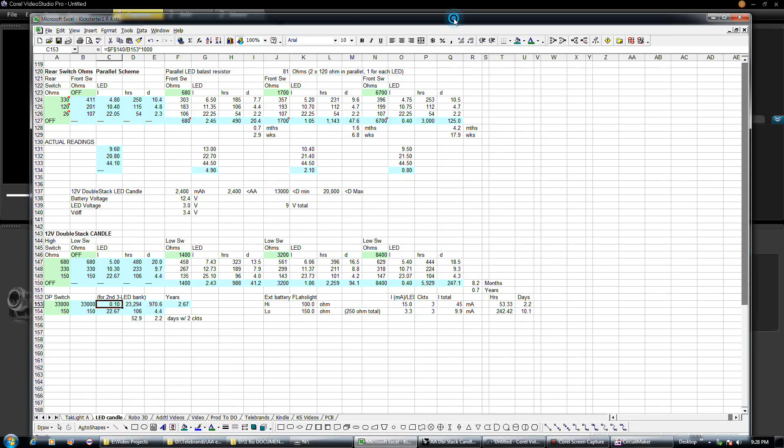Anyway, that's kind of what I'm doing with that, just to fill you in on the various settings on these switches.

Back to this, like I said, we got our relay kind of nestled up in there now, and go ahead and light back up the electronics layer 2. So that solves our crowding problem with this board here, by taking that relay out of the equation.

I'll call this relay. So we hide it if we need to. It's got those curves on it right now. I'm going to need to go ahead and move those to the LED board retainer layer, I think. Well, hold on. I guess I need a new layer.

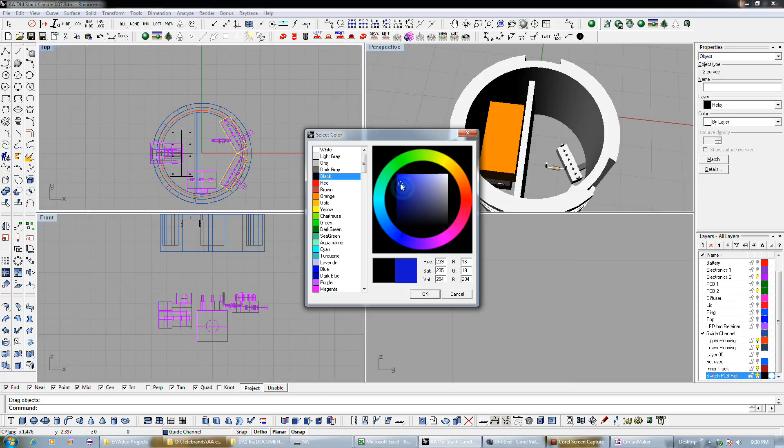Switchboard retainer, which is right below the guide channel. I'll move these lines to that layer.

So, anyway, with that I can hide her. What else disappeared? So, hide the relay there, and like I said, for this channel...

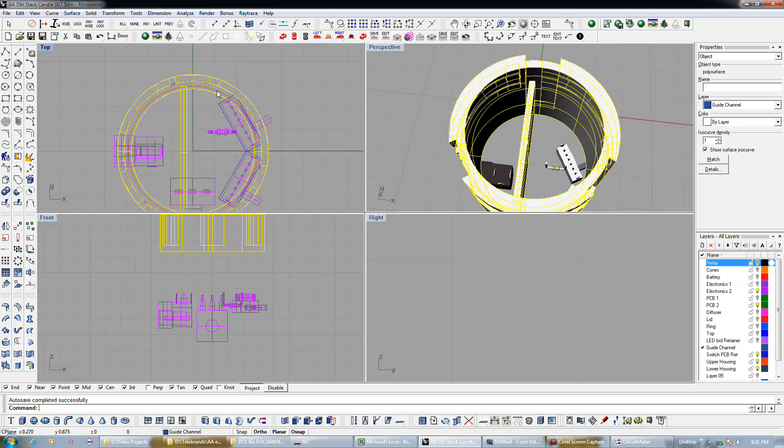Let me think about this a little bit. Because we're going to have this wall here. We know we're going to have this thick of a piece mating with this piece down here, whatever we're going to house the circuit board in. The circuit board is going to lay on top of whatever this is going to be.

And again, I was kind of playing with the idea that since this piece we're about to do is going to be printed from the bottom up as well, it could actually have a concentric ring in it, but that might be kind of hard to pull off given what we're doing here. So I'm still thinking about that.

Because our circuit board—we don't necessarily have to fully follow the wall thickness on this piece down below. However, if we're going to make a piece that concentrically joins on the inside of this, that could be tricky. And the other thing that's going to be tricky is the fact that I wanted a skirt to come down from this piece to join up here.

So I may actually have to, believe it or not, print an intermediate ring to actually adapt this piece to that piece. Could be a little screwy. If I did, I don't think that would work very well.

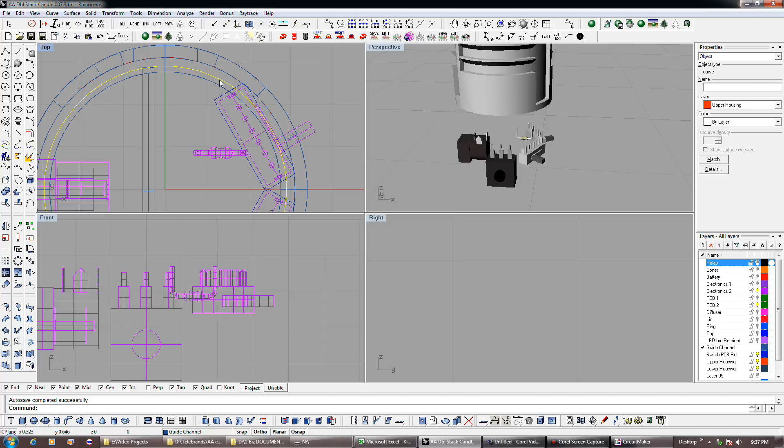See, our circuit board is probably going to have to follow kind of this line here. So I'll put that on PCB 2.

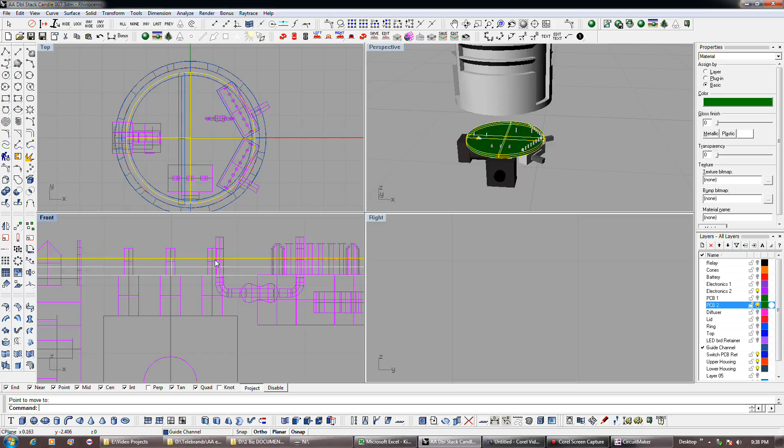Anyway, so that will probably be our basic circuit board layout there. And with this, we got plenty of room to position a few resistors and the like.

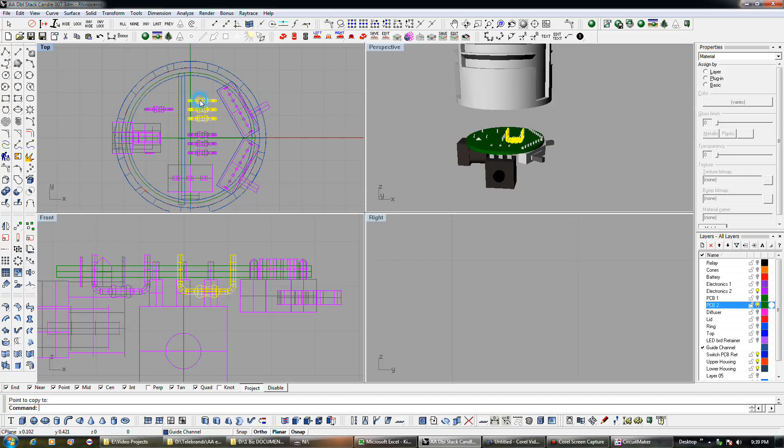Let's see. It's going to be tight. Something like that would be a layout, but...

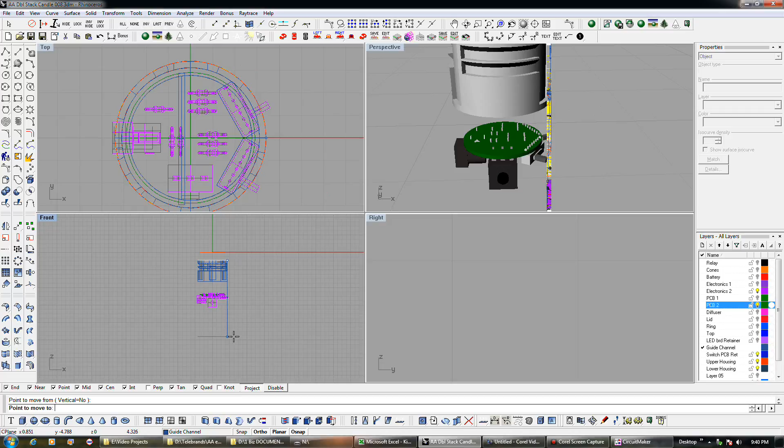So that's kind of what I'm going to focus on, I think, right now. Is getting this in basic position somewhere. I'll figure out where to put that exactly later.

That gets rid of that, but we know what our outer diameter is going to be. That's our circuit board, which has got enough real estate to accommodate all of our pins and everything, so it'll have to have a retainer.

Something like that in it, just to basically capture the circuit board. Then its walls will go from, will be these two. Its outer walls above the circuit board will come up like that, around it, and then mate to whatever we're going to do for a switch skirt. Whatever adapter we have to make, that channel guides to this part down here.

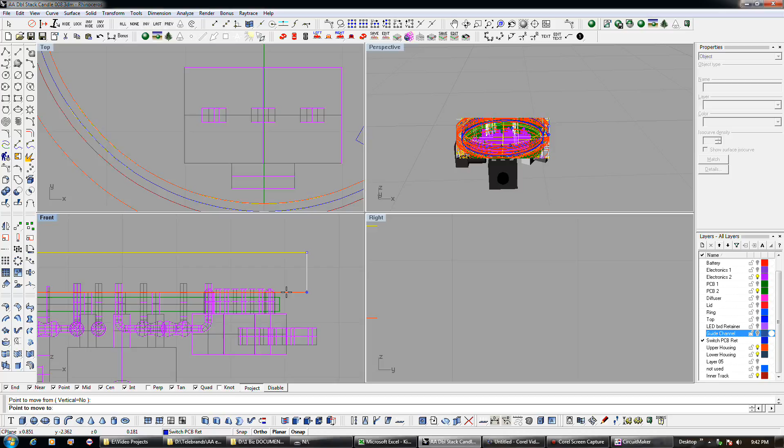So it's 204 mil. Bring it about here, because whatever adapter we're going to put will basically help allow for some room for the solder joints and all that.

But, like I said, before we do any of that, I've got to go in and provide some kind of a switch well here. It's starting to get annoying.

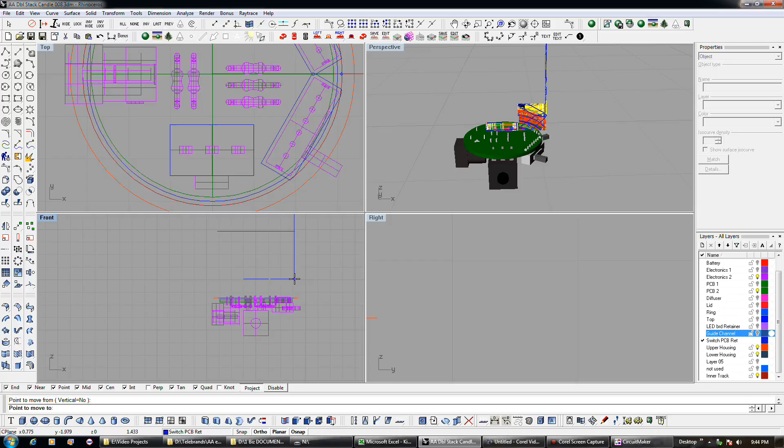Okay. Now this I'm going to put, I'm going to leave some pretty generous tolerance around it. This is fine. I drew this earlier and we imported it. That's from a previous switch well on a previous project, so I know it'll work.

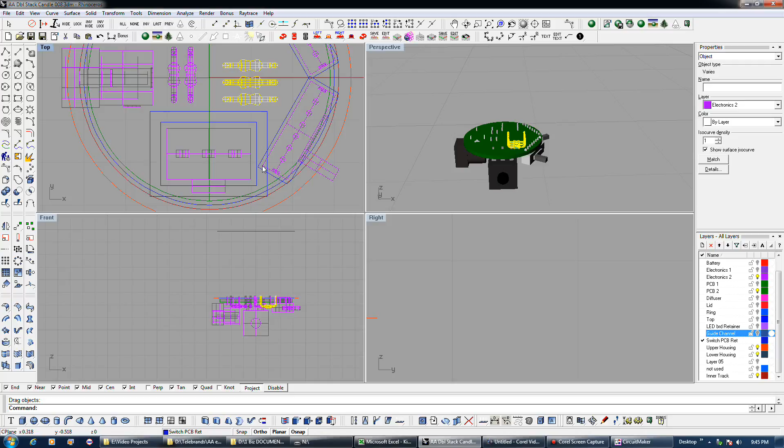Okay, this wall will be something like that, and again, this is below board, so these will run into it. So will these. I could go with less than a 1/16 of an inch, I suppose, but this is going to eat into it, so that's a little bit of a problem. Let me think.

Little closer tolerance here. Let's see what I can get away with. Still really nip into that.

I'll probably make this a solid piece with this. Yeah.

I got kind of a headache today. I probably shouldn't be doing this stuff.

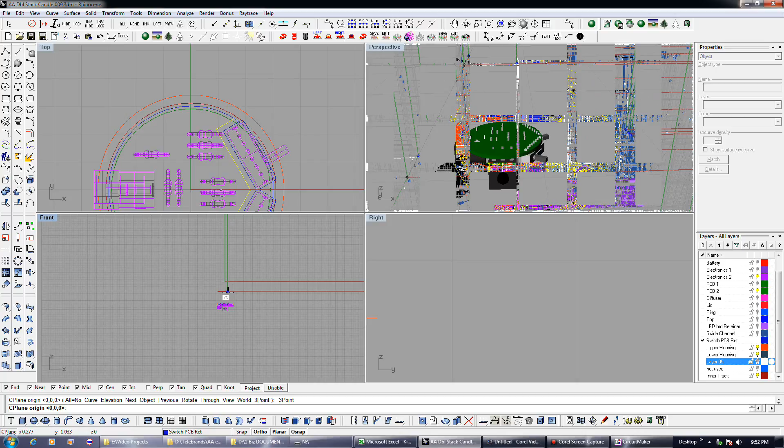Actually, I don't know why I did that.

Yeah, I don't know what the hell's going on. That's why I don't like messing with this, because like I said, these tools are kind of funky, and trying to move your C-plane, you know.

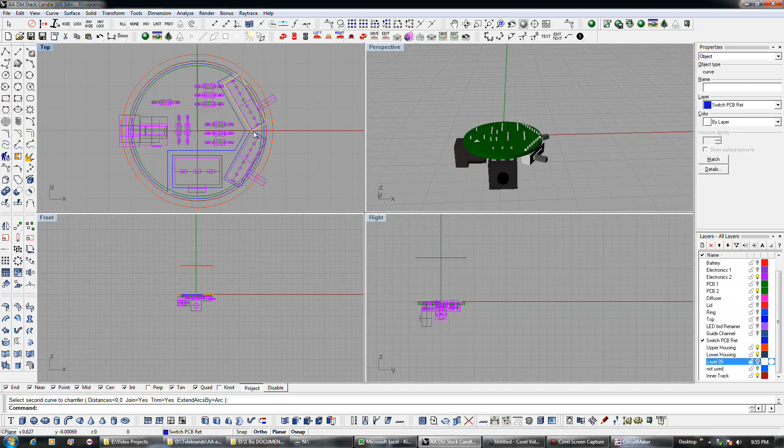Yeah, I probably will. First I'll save these just in case. Let's see.

Okay, so that's our switch wells, for both the switches. Now this, we got to do something a little different with, because this is the outer edge, and we're going to have a button that comes in here, but I can flatten that out, maybe.

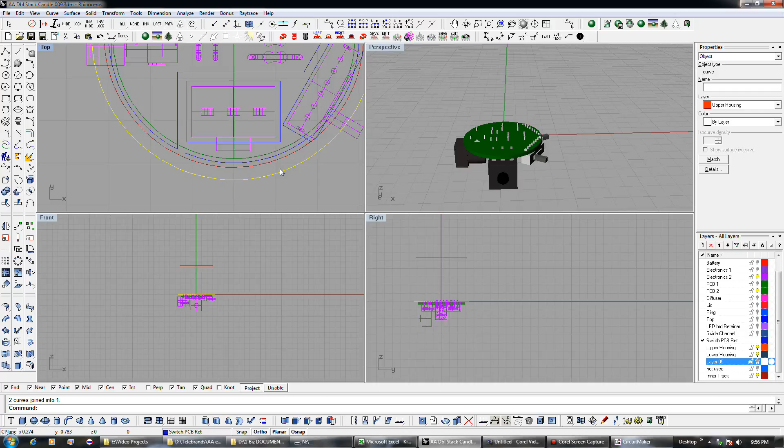So I might go ahead and just flatten it out and treat it, because I'm going to have to print my own button, because the switch is just not long enough to stick out through the side of the housing, so I've got to print my own plastic button. I'll probably make it circular,

Which we should be able to get away with, so I probably don't need this piece. I'll just save it for later. But I'll go ahead and just keep everything flat. That'll keep things nice and simple.

So that'll be our cutout, and here we'll have a button. It's got to be within this limit.

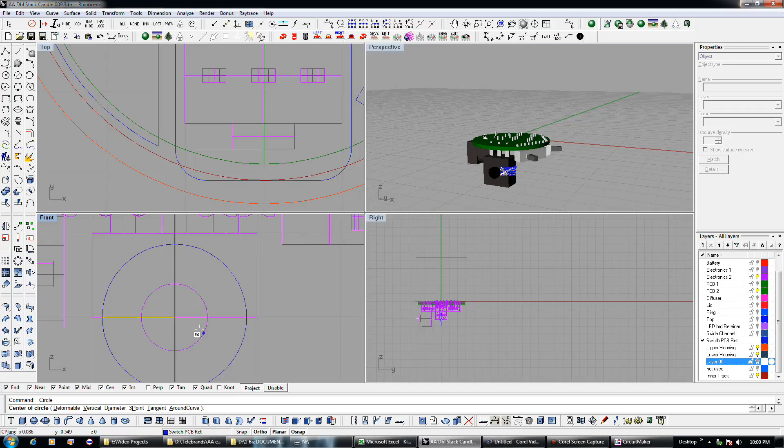Okay, so this is, well, okay, 437 mil diameter. So I'll take it about, yeah, so it's 437, 387.

Okay, so that'll be the hole for it. Okay, so this is 387.

Let me give this tolerance like that. So that'll be our button diameter right there, about 337 mil, so it's certainly well over a quarter of an inch, almost 3/8.

That's a pretty good size for an actual physical push button. That'll be the hole for the push button that we're going to drill on the side of the part we're about to create. And that'll be the inner layer of the push button itself. So, let's move these curves up here.

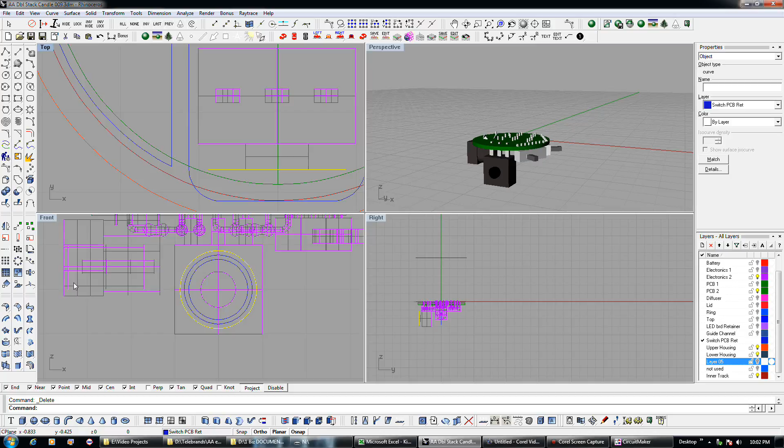Now this button right here, again, I'm not going to really allow it any tolerance. Well, I'll allow it a little bit. 0.085.

Gotta use negative values. Okay, that's the actual button itself, and we're going to want that to stick out a ways, well beyond the travel of the button, so I want it to stick out of the housing considerably more than that.

Take into account, you don't want your finger going into a hole or whatever. It's good to have a positive contact on it at all times.

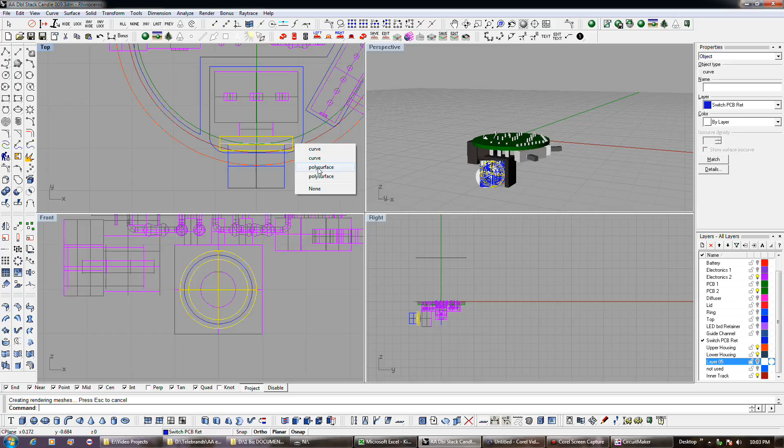Okay, that's got that. And I'll weld. Really? Seriously? Weld these two together. And I might go ahead and try to put a

fillet around the edge here, 0.08, something like that, to give us a bit of a curved surface to it. So that ought to work. That'd be our push button right there.

Okay, basically at this point in time, we should be able to start carving things up, I think.

Oh, well, I do need to look at this real quick. Like I said, we got this thing here, and it's going to actually stick out a little bit. So again, I need to write a really generous allowance here, like 50 mil or something like that per side.

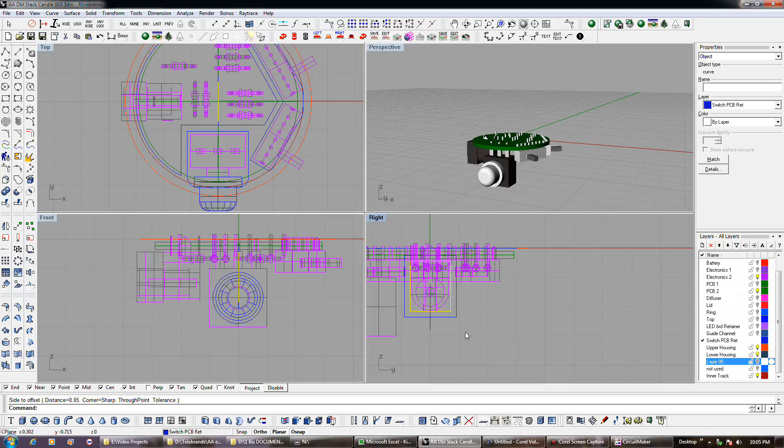It'll leave a bit of an unsightly gap in it, but we got a lot of tolerancing issues with all these parts fitting in there. It doesn't hurt to have a little bit of a loose tolerance in it.

Although I may do a little closer than that. Do about 40 mil. But again, like I said, I kind of want to do two versions of this because I still may change my mind about this whole

nightlight thing, or emergency light circuit thing. So once I extrude this part and get it carved up, this will be the last thing I do is cut this out of it.

Although for this I'm going to need a skirt too, actually, now that I think about it. Because that's the other thing, I'm going to need a skirt for this as well. So let me

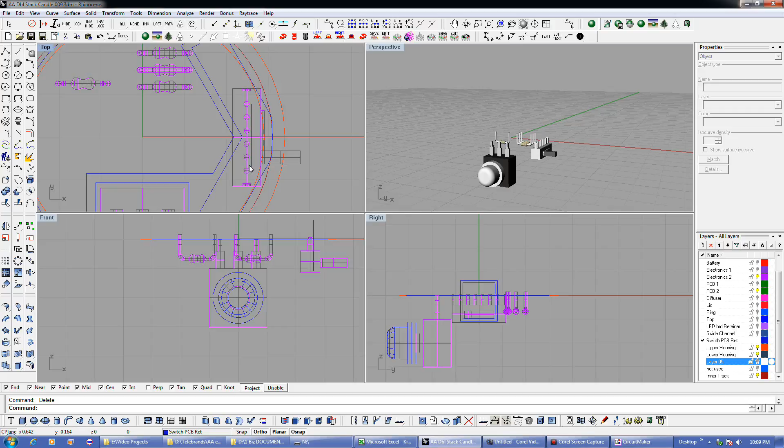So I don't need this anymore. Let me unhide everything. Okay, but I do need to come over to this and

remember we got this thing here with a pretty good free tolerance around it. But like I said, we're probably going to want some kind of skirt on it as well, so that skirt will top out.

It's got to be well below the switch by 35 mil. So something like about, you know, about like that.

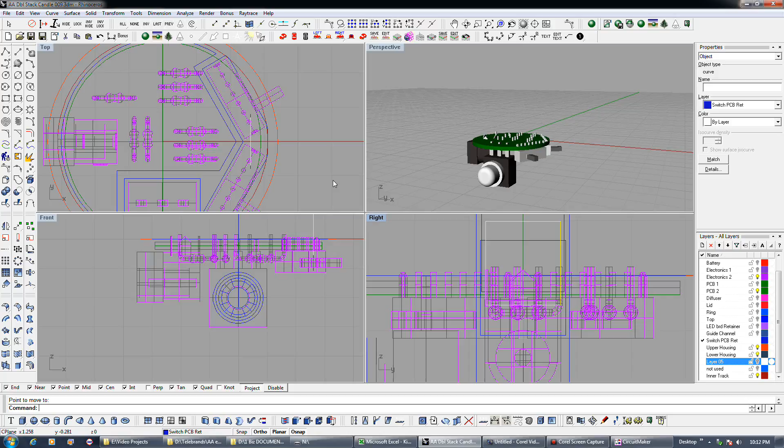Usually I just make one set of curves, extrude the solids, and then rotate them and copy them. So I end up with a bunch of curves everywhere to get rid of.

Okay, but at this point I should be able to go ahead and extrude our base. Now it's got to be lower than this, which is already a pretty healthy 3/4 of an inch.

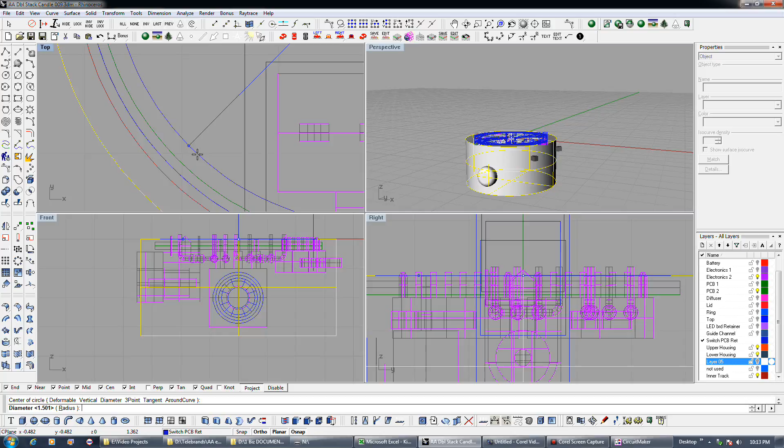Okay, I screwed up. This curve here actually is for a circuit board. This curve here, that's joining up with this, we actually need to have that act like a shelf of sorts for a circuit board to sit on, and we're going to make sure it's not going to interfere with any solder joints or anything anywhere on here.

So that's one of the things, it's taking us a little close. So it's going to have to come out to about right like that, and that's not giving us very much room for the circuit board to sit on, but it can actually sit on our little wall here that we're going to have. And it actually only travels around here, though, to some extent.

So hold on a minute. I think we can stick with that shelf. This one I'm going to have to nip into.

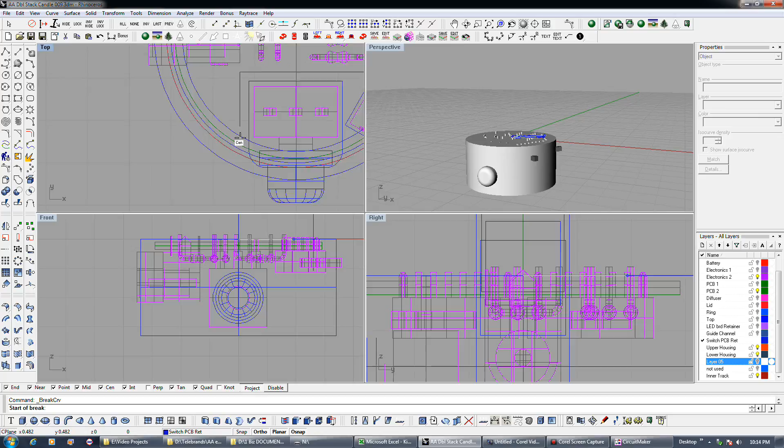So that's our new curve, because that's going to be cut below this, because that's our circuit board and circuit board outline layer, and that's the inner wall. That inner wall is going to come down here, to at least something like, just like I said, a little below this.

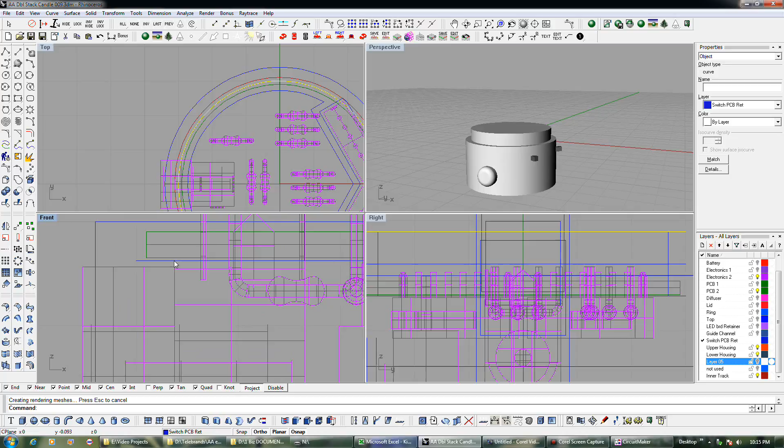287, and I'll just put it like right there. So we can trim this sucker out, and that's got our basic circuit board shelf there. But we don't have anything below it yet.

Now this right here, this section here. Now first let me point out, for our little switch here, we don't need any kind of retainer or anything. I mean, I don't need any kind of a backing wall. See, I needed a backing wall on this switch because we got this button that we're going to be pushing against it, so it's got to have something positive to prevent the button's leads from being bent over.

So it's got to have something for a positive force to go up against. So that's why we had to extend this wall over here. And this wall here is mostly just to keep the circuit board orientated properly. So when you push a button like this, or slide a switch, it doesn't rotate the circuit board instead. So that's part of the reason we put a retainer wall around the switch wells, or when we made the switch wells, I mean.

Now, of course, right up here, we've definitely got an interference, and, you know, again, this is going to be a little convoluted when it comes to actually doing the circuit board route. Hopefully not too bad, but we'll see. I can always move things around later on that.

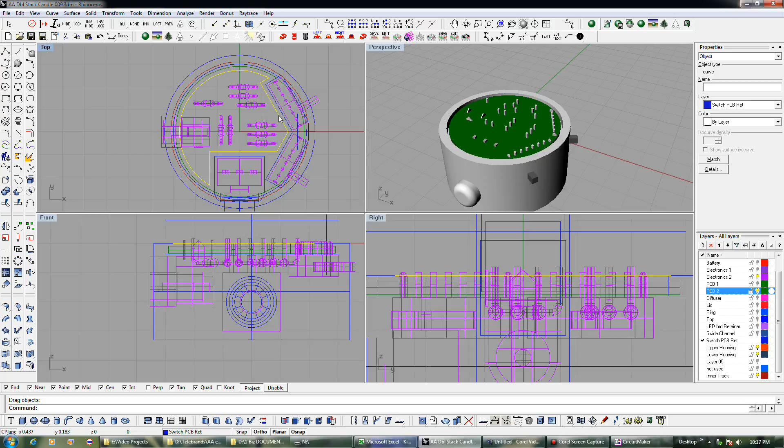But at this point, this piece here, we want to pretty much just burrow its way completely through the housing. So again, let me... okay, so now when I remove the PCB, you see where we're at.

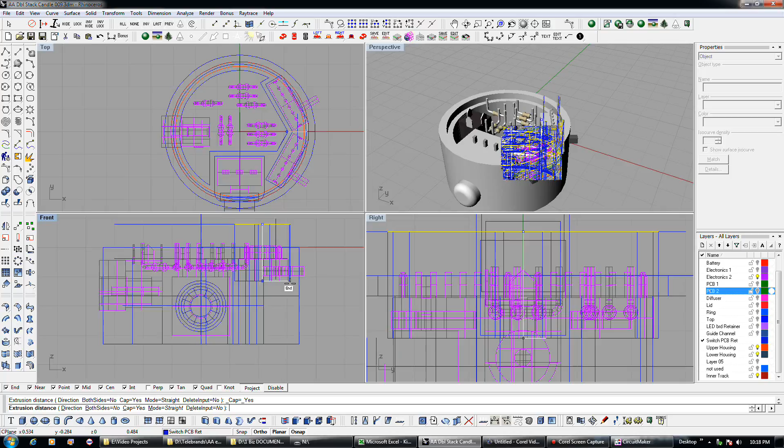Okay, now at this point, I need to take this up here, and it doesn't hurt for it to be deeper than the switch by an arbitrary amount. And then let's see, I gotta do the same thing with this.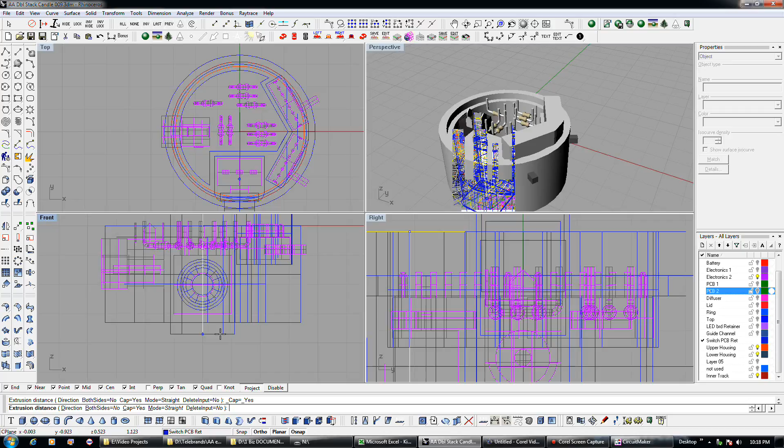And this actually could go completely through too. I mean, there's no reason for it to stop at the bottom of that necessarily. But I'll probably actually bottom it out here. Because like I said, for that matter, this actually could extend clear to the bottom too. I mean, there's really no reason to put a bottom on it per se.

But on this, I'd kind of rather put a bottom on it because of how it interacts with this other well. So, again, given how much this is going to nip into, how close this distance is going to be, that's a very, very tiny distance right there. So I'll go ahead and keep that as it is.

And this, I'm kind of thinking again about bottoming out, although I don't know. I'm probably going to go ahead and extend this just clear through it. This cookie cutter right through it.

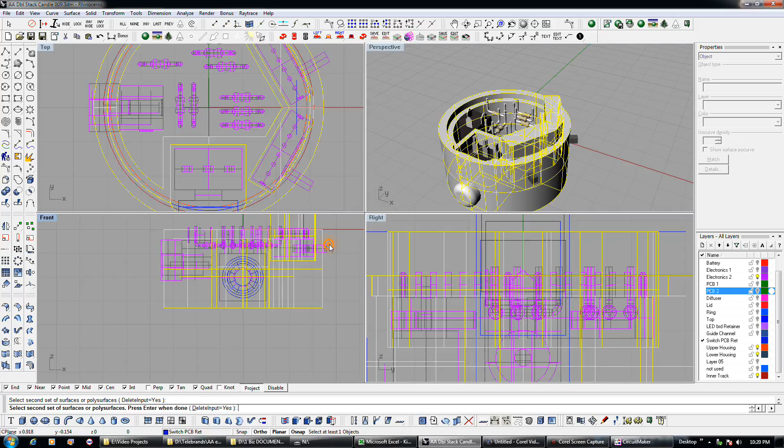Okay. That provides us our basic wells there, and again, since we're going to have an adapter that glues to this, to adapt to that other piece, that's all nice and dandy, although we might even not need that really, but again, I'm still not done yet, but we do need it. We need it because we need a skirt. So strike that comment.

But like I said, looking at this from the bottom, you see we don't have any holes carved or buttons or anything yet. This goes clear through, and our slide switches are retained up in there. At this point, I want to go ahead and copy and save one of these primitives.

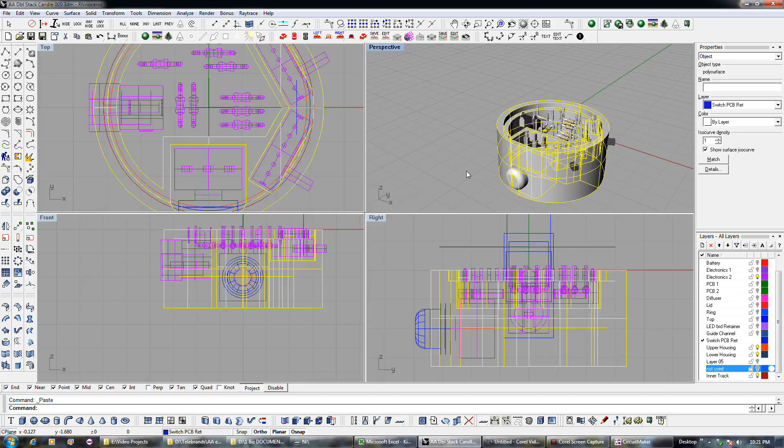So I've got a piece in case I mess up and have to come back. That's what kind of sucks about this program, is that you have to redo everything. That's why it pays to think ahead sometimes on a part like this and actually save a more primitive copy, because I'm probably going to save another copy later too, with this hole and this hole and this hole drilled in it, but not this hole. In case I forget to do that, I've at least got this more primitive version that I don't have to start completely from scratch with again.

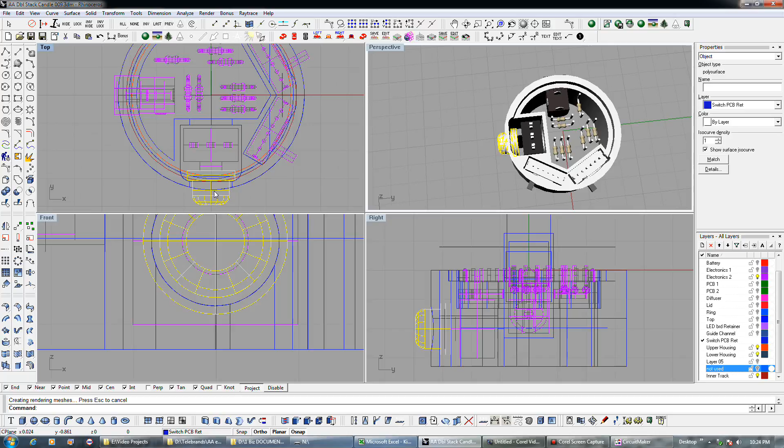Pull it back down again, but try to get at least one more. Alright, let's drill some holes. So that's our button. This is the hole we're going to be pulling through this. Go ahead and knock that out. Voila. There's our buttonhole with our button inside of it. You can see how this switch here is spring loaded, so it's got enough force to actually keep that thing in there. This button will print from the bottom layer, this top layer, when 3D printing. But there's enough room to actually take this button and lower it into the hole, into this well, and guide it into place, then you put the switch in behind it on the circuit board, and the spring-loaded action will keep it retained in there so it won't fall out.

Now we're going to take a look at, remember this is for our skirt, we're saving that for later, but this is the actual hole we need to cut out for the switches. That's why I positioned it here, because we don't want it cutting through our wall here. We just want it cutting through this outer wall.

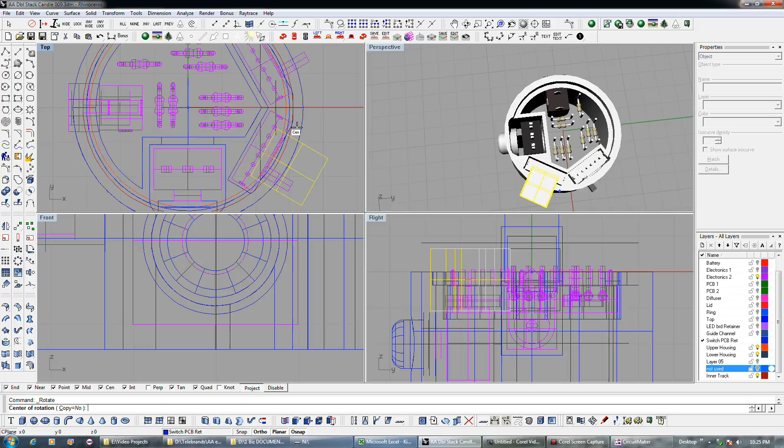And that's got that. Now you start to see why we need a skirt here, because otherwise if we just glued this to this piece here directly, there'd be one heck of a gap there, wouldn't you agree? So that'd be rather unsightly. That's why we need an adapter that goes from this piece to this piece. It can be flat bottomed or whatever we want, but we just need an adapter that goes between these two pieces and joins them, but also provides a little skirt that pops down below this, and later this as well.

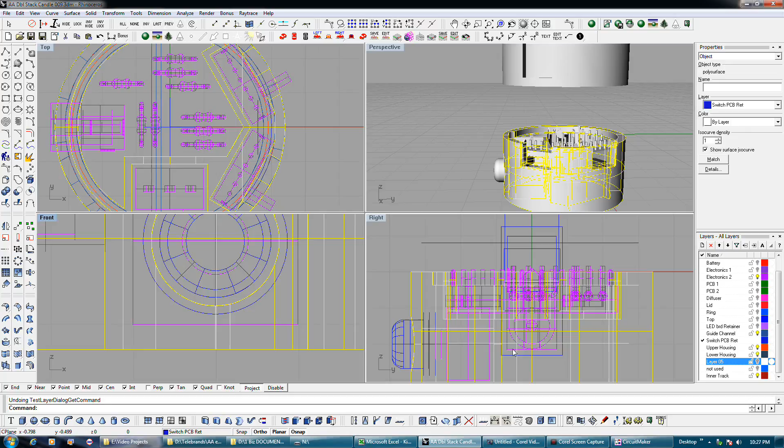But anyway, like I said, at this point, if I decided to do one of these devices without the little power failure thing in it, now's a good time to actually copy and save one of these devices, or one of these parts, before I go trimming holes out of it. So that's what this is for. It's the hole to trim out of it. Let me move it so it doesn't interfere with anything.

I'll grab this and remove that. So that's why we need a bit of a skirt up here as well. Let me turn on the circuit board, because otherwise the circuit board would actually appear through the opening. It'd be rather unsightly.

So that's the next task, is to make an adapter ring with a skirt on it. It joins with that, meld these two together, and that'll get us where we want to be.

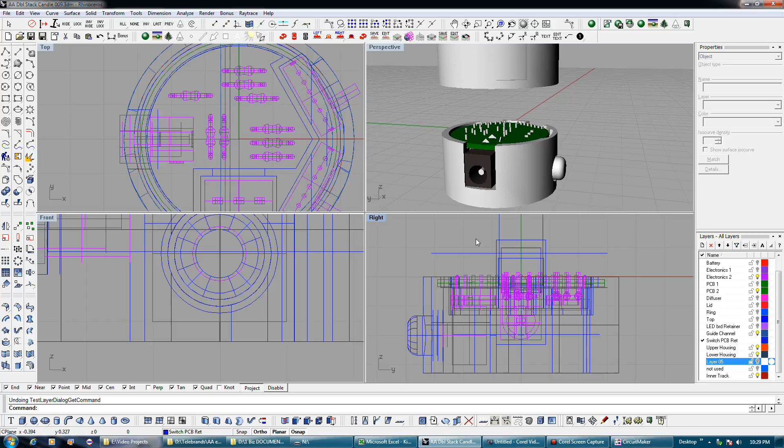Trying to size up how we're going to bond this. Because this ring, we don't want to interfere with any solder joints. Probably arguably should have made that a little longer than I did then.

Let me try this. I rarely use this command, but again, Rhino 5 has a much better version of this in it.

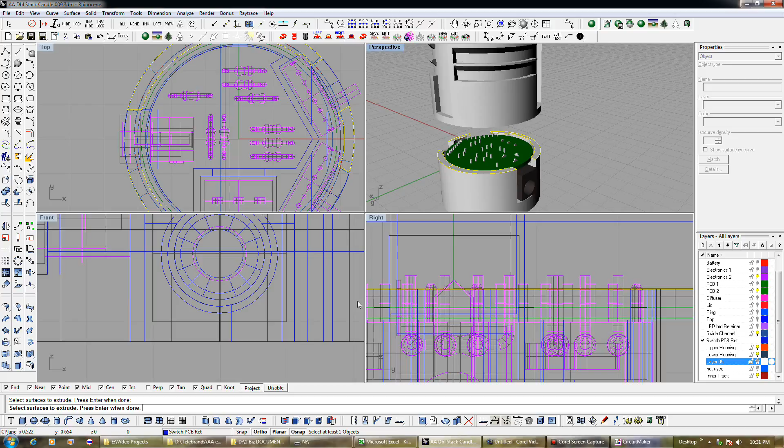It's got all three surfaces, so let me see if we can, by chance, get away with extruding this. I'm just going to pull it up an arbitrary amount so it's definitely clear of any solder joints, if this works.

It's really not giving me an idea of how long, so again, this was a bonus tool, I think. Alright, let's see if that worked. I don't know, that may have messed things up. Let me undo it.

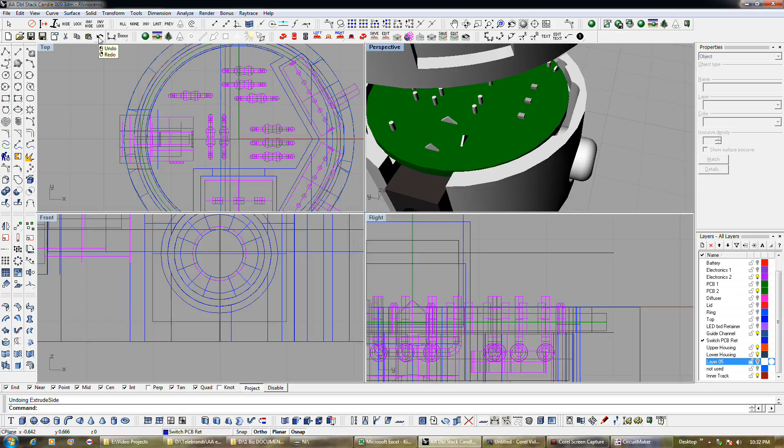You can see how smooth this is right now, and let me extend it. It seems like it may have made it a little more primitive. See, it seems like there are fewer polygons in this than there are in this. It looks a little rougher, which means we could end up with something that's not quite working right. It implies that it changed the type of object this is and maybe made it into a mesh or something.

I don't know, that's why I rarely use commands like that, because they screw things up. In order to correct this, I'd have to go and redraw the whole part. That's what sucks about this kind of program. I'd have to go redraw the whole freaking thing. Everything I just did for the last hour I'd have to redo just to make that longer, because this program kind of bites when it comes to things like that.

Again, Rhino 5 doesn't have that problem. This program does, so it just really sucks that you're kind of stuck with it. There's no real good solution in this program. I don't know what the hell they were thinking when they made this thing, but there are definitely better programs out there for this sort of thing, including the new version of Rhino.

That's why programs like this aren't particularly good for doing this kind of design, because it's pretty much impossible to go modify it. You're lucky to be able to get this far with it, with Boolean operations not seizing on you and failing and everything else. Going and trying to further modify them is pretty much out of the question.

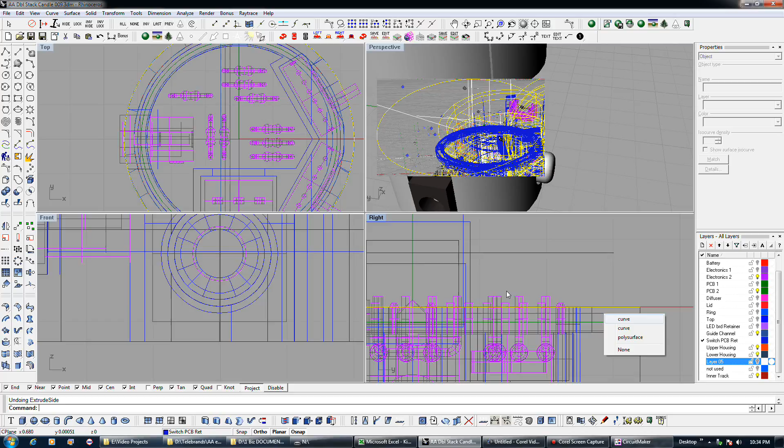At any rate, I'm basically stuck with it. I should have made this thing a little deeper, so it was fully above the solder joints. That would have given me a little less of a headache at this stage. What I'm going to have to do is come up with something that basically follows this outline, because I still can't come up with something that covers those solder joints in any way.

But I guess, yeah, that's the inner shelf. No, let me hide that damn thing. Okay, but now see, the inner shelf is here. So along here was sort of an outer wall.

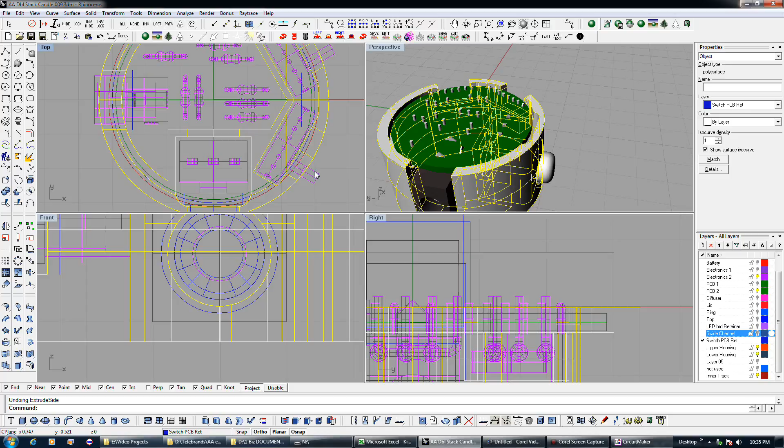I'll probably just make this into an inner ring and follow. Oh my God. That's what happens when you throw things on your junk layer a lot.

I'll probably take this and extend that out as a surface, and I'll take this, use this for an outer guide ring. But the question becomes, how do I want to pursue these skirts? Do I want to cut them out of this solid?

Actually, probably just going to cookie cutter it. Let me just do it this way. Okay, now the length of the ring, let me light up this again.

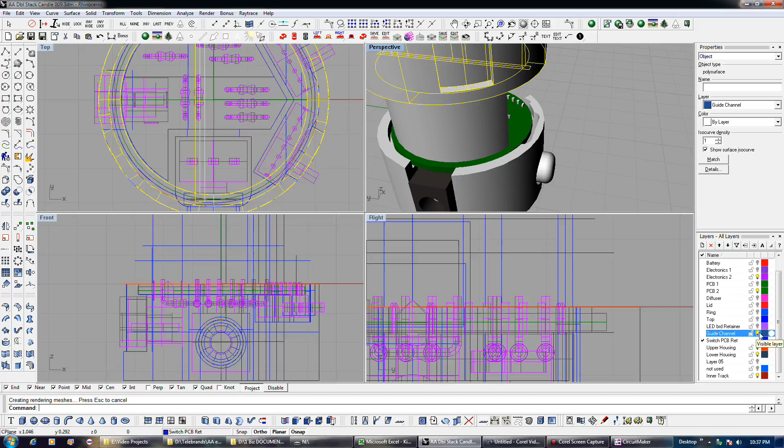Okay boy, that's following it close. Yeah, it's got to be flat anyway, so it doesn't really matter. Okay, yeah. Alright, like I said, this is going to be flat, so I just need it to act as a skirt ring, so I'll just arbitrarily make it 0.1 inch, a tenth of an inch.

Then let me go and cut this sucker out. So it's giving us that part there. Although again, we're going over solder joints, so I'm really going to have to cut this sucker out too, and this sucker.

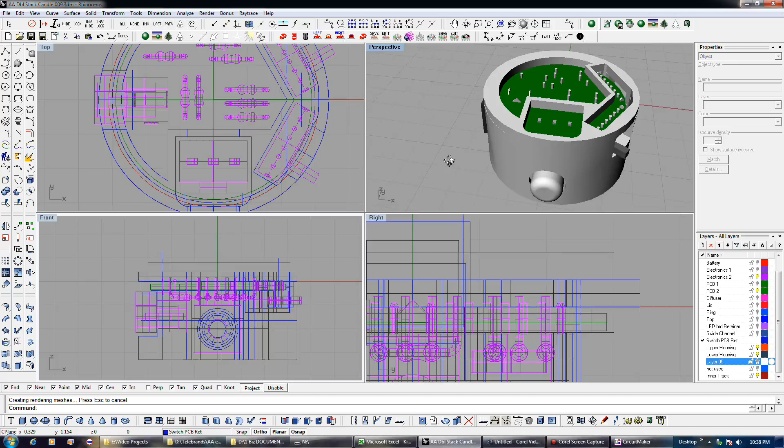So it basically just replicated the pattern. On the other hand, hell, I don't need this per se. Really, now do I?

Although it would act like a good circuit board retainer, but we really don't need this stuff over it because it's not really doing much. Let me look at this.

But it will help hold the circuit board in though, once we've got that in place.

And again, these little pins here, I always cut them off of these switches, so they're really not going to be a soldering factor. I never even drill holes for them, I just cut them off with wire nips.

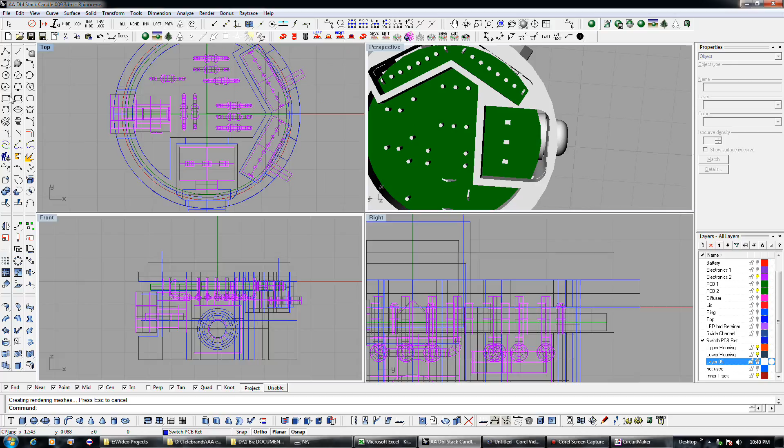Yeah, I think what I'll do is this. Let me... circle kind of like this. In fact, I might actually come here so we get some benefit.

Mechanical hold down.

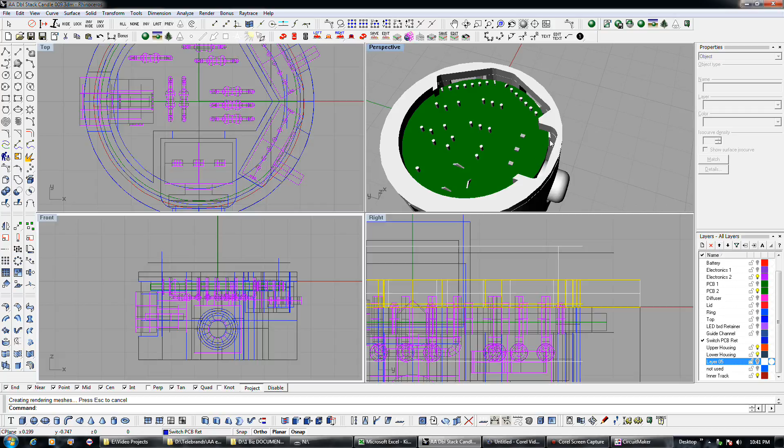Okay, so basically it gives us a couple little fingers that stick out there to kind of keep this thing in place, without really obstructing any solder joints or anything. But it still will act as a keep, so the circuit board won't just kind of float around up in there for some arbitrary reason.

Anyway, this ring is what we'll end up attaching our skirts to. But like I said, we got this going down here. So what I need to do is take this curve here and extend it downward to our deepest skirt level.

Which I can hardly see amidst all this mess. Let's see, which one is the deepest? Let me see first. Okay, we don't need that one anymore. Let me move that out of my way. We don't need this one anymore because that's for our cutout for a power jack, but this is for a skirt and this is for a skirt. So it's really that one we need to adhere to.

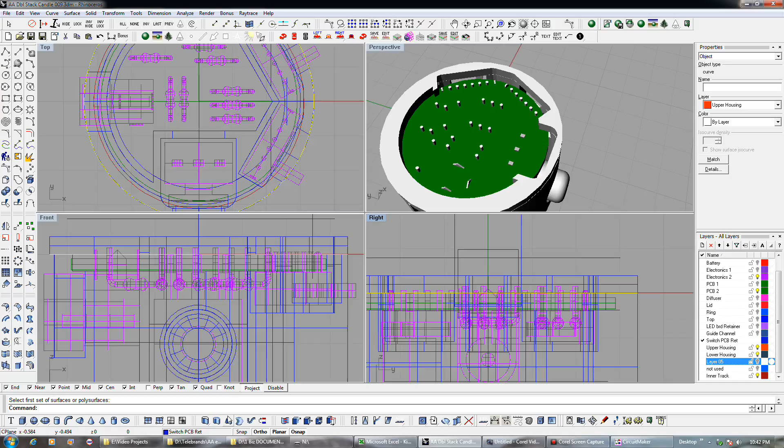So that would be about the bottom, the lowest skirt. Now I'm going to move these down slightly, or that one down slightly. But this other skirt's at a different level, so that creates a, well, we'll just have to do it again.

So let's just deal with this one first. Let me extend this out like that and get rid of that curve. Now let me take this sucker here and grab the cylinder we just created and do a Boolean Union, and what that should have done, if we can find it, is created a piece like that, which is too thick.

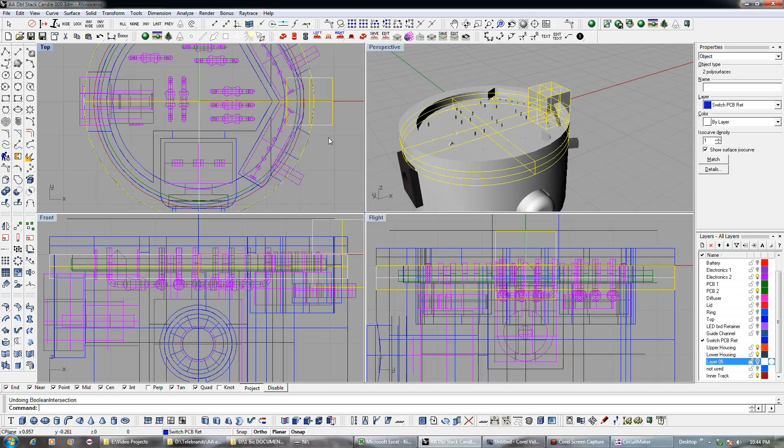Okay, yeah, that's because I didn't do it right. I've got two. Okay, so we got this curve here, which is important, but I got to go define, because I've yet to do that, what our inner curve is going to be here. I have not actually done this yet at all. Let's see.

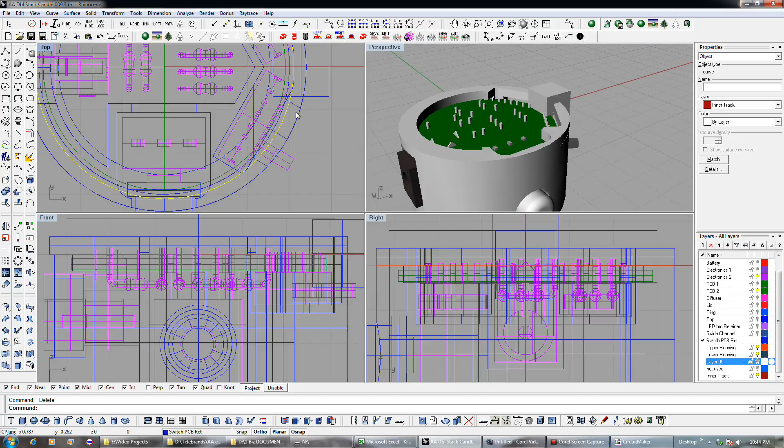It'll be interesting to see if this Boolean Union works. Oh, shite. Well, actually, I don't.

Yeah, I guess I can skirt it. I'll make the outer wall about 40 mil. And we'll go with a 20 mil tolerance will put us there. I mean, that's hardly any real discrepancy between these two. About 11 mil.

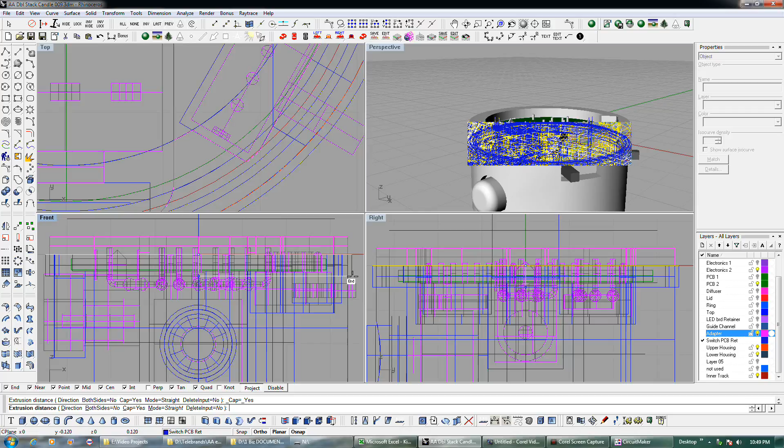And then I'm going to go take this, incremental save, try to Boolean subtract that, which it didn't work, so that doesn't surprise me. So, see, that's what I'm saying. That's what kind of a mess this software is. It's just kind of a joke, really. I mean, you can do a lot with it, but that was good for 2006, but, you know, I'll tell you.

The program more often than not will stop you in your tracks, so due to stuff like that, it can't do a simple Boolean difference here, under a whole lot of different circumstances, by the way.

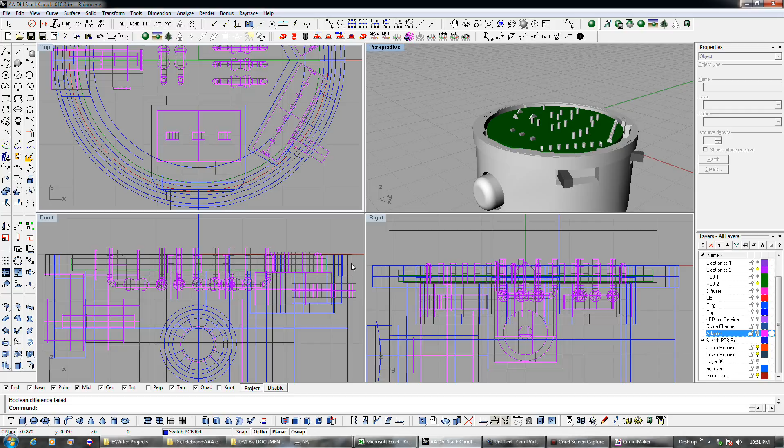Well, let me try to see if I can do it this way. For this piece, it might just be a face problem. Sometimes it is. Let me see if I can just extend it up there and get rid of it this way. Nope. That's why I say with this program, you just usually can't do what you want to do, basically. It's just, it sucks.

It would have been okay, probably, if we'd done this first before cutting any of these holes. But now with all these holes and complexities in it, you just can't cut it anymore. This really isn't that complex of a shape to be cutting out, but it's running into problems right here. That could be part of it, but I really can't do anything about that. It could be this curve intersecting with that right here causing it to fail. It's just not liking that - probably what's causing it.

Again, if you've got the thousands of dollars - $5,000-$10,000 - you can go buy a really good program and not run into problems like this, like SolidWorks or something.

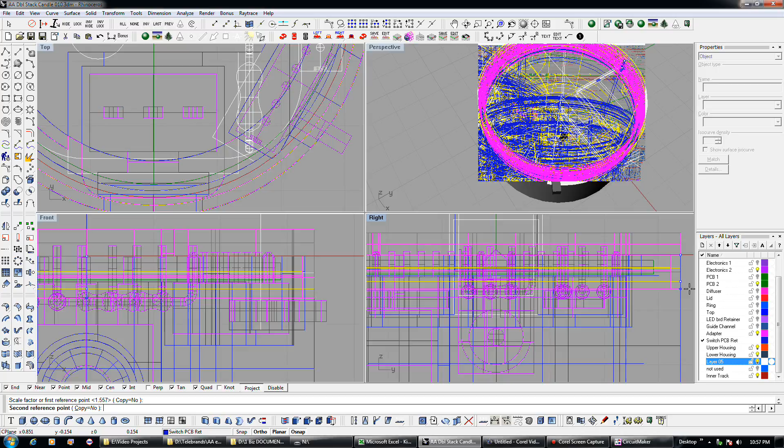Okay. Just about right there, so...

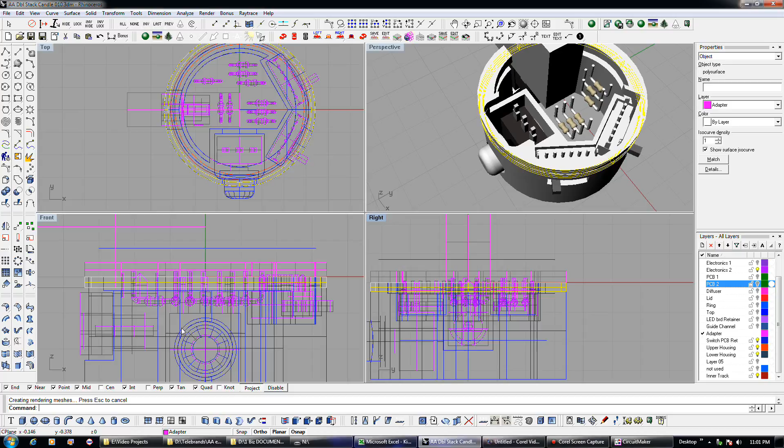Okay, now let me take this, extrude that out, if I can make a skirt for the other side.

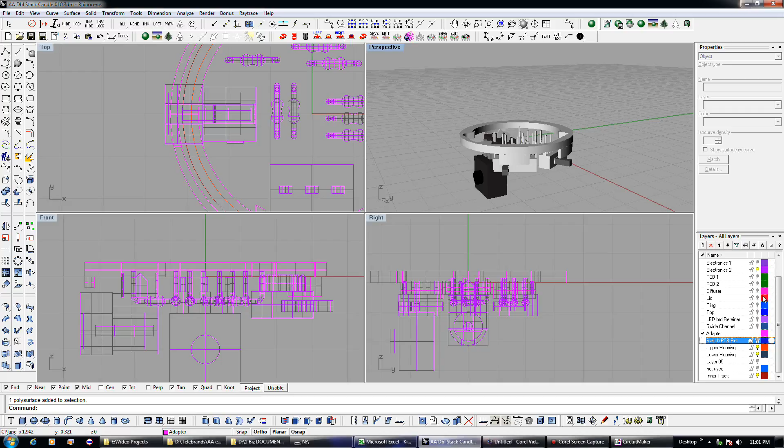Alright, then we can go and hide all this clutter, and that's the piece with the skirts on it that we're after, if we can get it to successfully weld, which who knows.

Probably should have saved it first. Okay, well, it looks like it did successfully weld.

So if I light the bottom up, you can see that it acts like a - well, that's not going to work. Damn it. What the fuck did this...

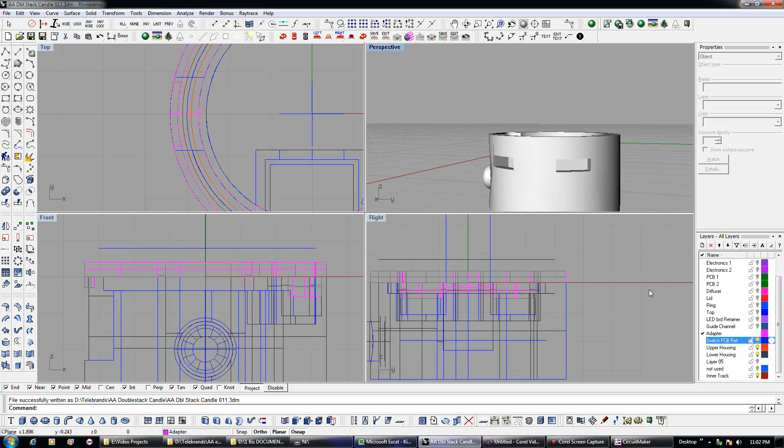That's more like it's supposed to look, but apparently I've got to do this all over again. Damn it.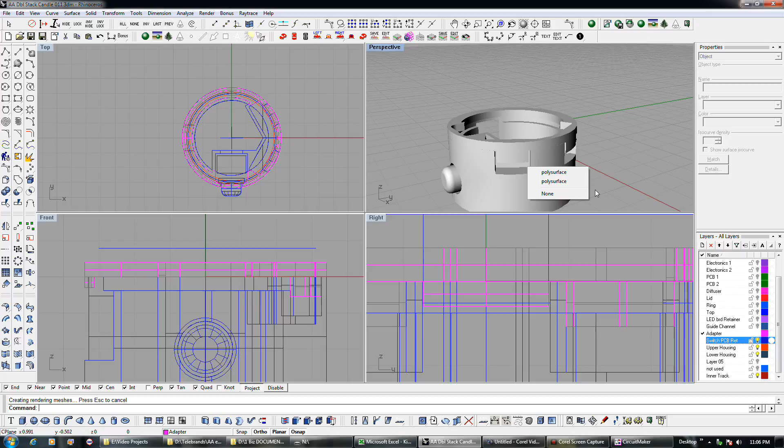This is giving us enough room to take into account for the fact that parts will be fatter than we think they're going to be on 3D printing. So it's a little less apparent - these big gaps are a little less apparent in an actual print than they are here in the more precise CAD world.

Let's see, that provides our - because of how I had it before, if I would have done that, basically the parts wouldn't fit together and I'd have to go carve them up with nippers or something. I don't want to have to do that.

At any rate, that's our skirt adapter ring. That's that, so basically...

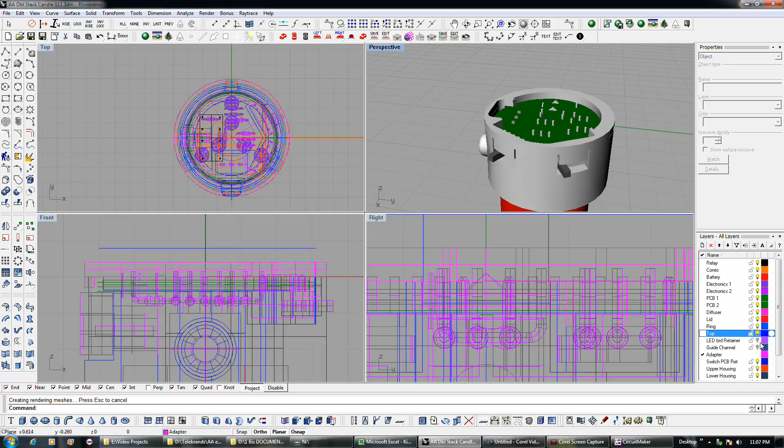I can pretty much line everything up at this point so we can get everything kind of positioned. At this point I can pretty much grab everything up there and we will reposition it.

Now to join this. Okay. So that's our light so far. So at this point...

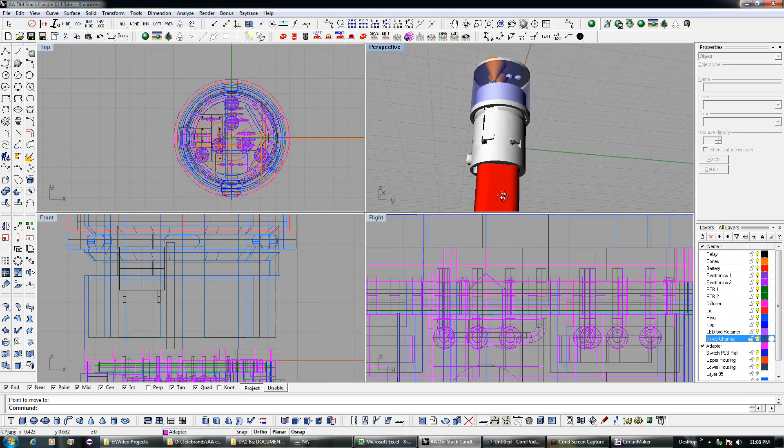You can see the battery is sticking at the bottom, so I have to move that down. This is going to be a pretty tall thing.

You can kind of see that, with the lens extended to its topmost position, that's about 8 or 9 inches. With the battery compartment, it'll be at least 8 inches tall with the diffuser down.

So it's going to be a pretty large device, which really just can't be helped given what we're doing here - bigger than I like, but that's why I've got to put a flared bottom on the thing. We don't want it tipping over too easily.

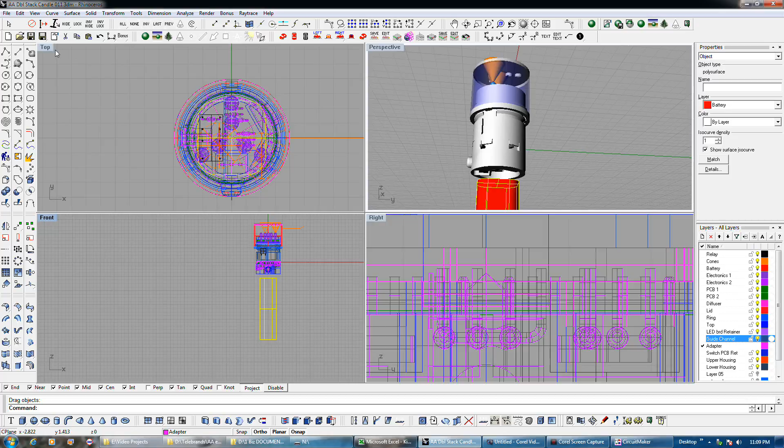Anyway, at this point, we'll have this piece glued to our upper battery compartment housing, which will have a thread on it, and then below that we'll have the lower battery compartment housing, which will have a joining or mating thread with it. So we'll pick up that project tomorrow.